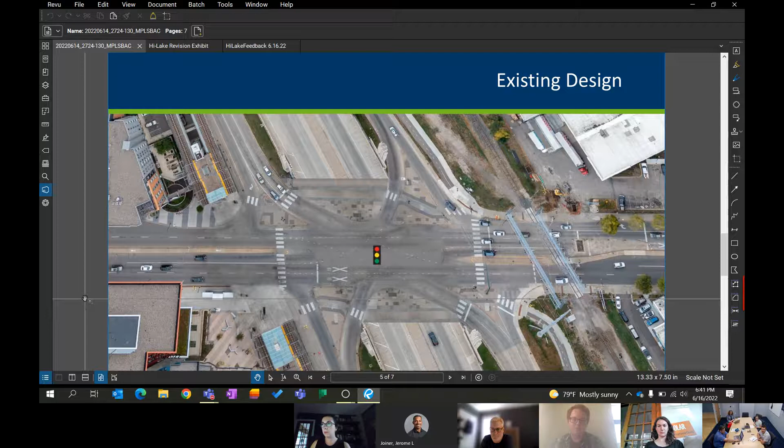With that, we'll go over to the layout. So we'll start here in the middle. The scope of the project really goes from 22nd Avenue to Snelling on the east side.

So that really shows where the focus of the project is. As you get on either side of 22nd or Snelling, we have work beyond that, but that's really trying to tie into existing Lake Street from the work we're doing at those intersections.

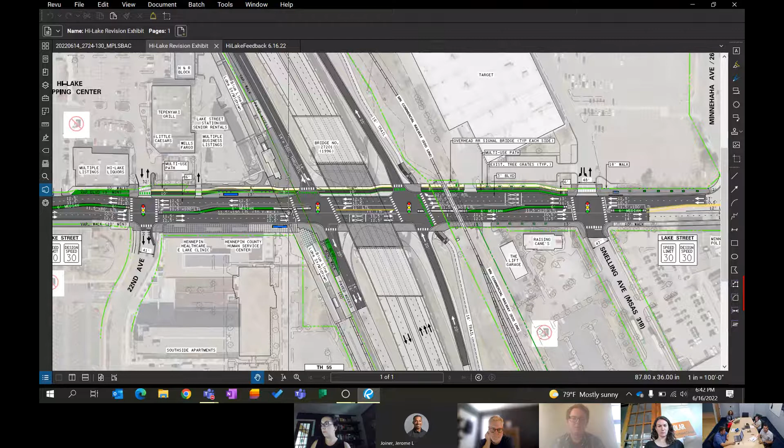So as we zoom into the actual interchange, you can see underlying where the old ramps were and how much we're tightening up the different corners and the different intersections for both ramps here.

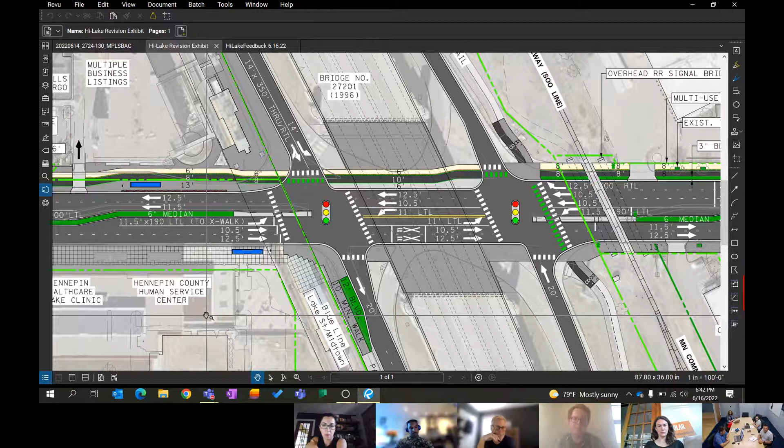Tightening up the corners will really slow vehicle speeds down as they turn. We're tightening up the travel lanes from 12-foot lanes to 10.5-foot lanes. We've identified a number of spots where we can provide more planting space, so a lot of the green on here is spots where we can plant trees, grasses, or other vegetation.

We've reduced the number of lanes coming off on the ramp. As you're coming southbound on Hiawatha and getting off to Lake Street, today there's 3 lanes there, and we're going to reduce that down to 2 lanes. And as you're going northbound on Hiawatha and getting off at Lake Street, today there's 2 lanes, and right now we're planning to make that 1 lane getting off.

So again, working to reduce that crossing distance for people trying to cross those roadways.

One of the big parts of this project, and especially the engagement we're doing, is the space under the bridge. As we reconfigure it, there's going to be a lot more space under the bridge, and we want to make sure there's a good plan for how that space is used, so it doesn't end up being a forgotten space that isn't an asset to the communities around it.

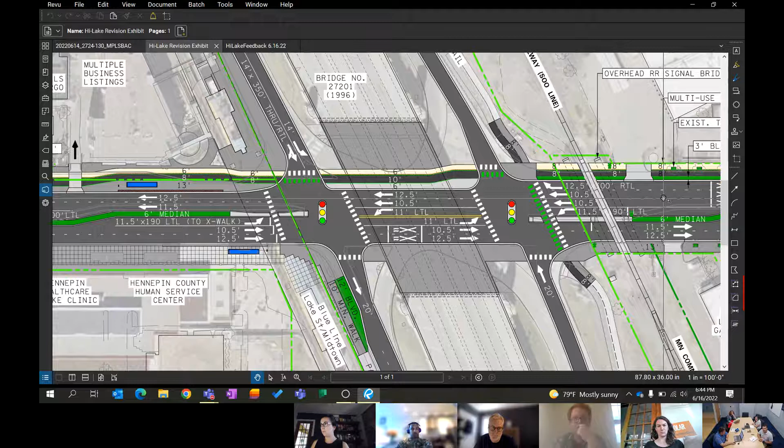As we move to the east here, I will note we have a bike facility on the north side of Lake Street that will go from Snelling to 22nd. There's a number of mature trees on both the north and south side of Lake Street that we're really going to try and keep.

If you were going to start over and optimize how you divide up your sidewalk space, we'd probably put the trees in a little bit different spot, but we really feel that maintaining those mature trees is important. So we're working within the confines of where they are today for our sidewalk space.

As you get over to Snelling, we have bump outs to again reduce that crossing distance and encourage vehicles to take those corners slower.

Also working on tightening up the driveways out of Target - their main entrance and exit right at Snelling, as well as a truck entrance and exit over by the railroad tracks that we're trying to tighten up and relocate to a better spot, while still making sure they can get their trucks in and out for their loading facility, but not as wide as it is today.

Then as we go to the west side, on the south side, we have the service center. We're keeping that pretty much as it is today, not looking to reconfigure it too much. On the north side, today there's a right turn lane into the shopping center to the north. That turn lane is going away, providing extra space for pedestrians and bicyclists, and you can see in blue the new A-BRT station for the B Line that will be installed in this area. Again, a bump out at 22nd Avenue on the south side, and on the north side, the driveway entrance into the shopping center is getting tightened up, so it's not as wide as it is today. We're trying to balance the crossing distance with the impacts to their access roads and parking lots there.

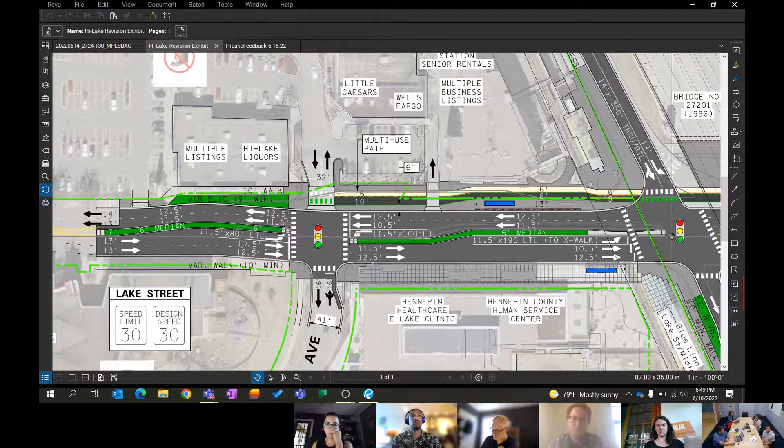One thing that Metro Transit did raise for consideration with this project is a queue jump, maybe to the east, Jason, if you want to go - which could allow the bus to get a head start at that right turn lane, in the event of a red light turning green. That's something that's in a later design phase of the project.

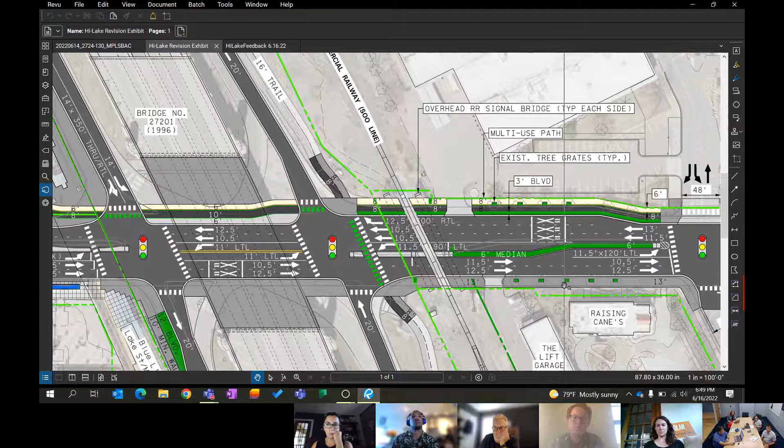Great, thank you. Did we do that justice, Yasna? You're involved in a lot. Okay, that's...

And I know we don't have a large number of community members on the call tonight, but in case they have ideas after seeing this presentation, what are their opportunities to inform either the layout, the landscaping, or any of the next steps coming forward? Yeah, I would say reach out to me and I'll connect them with the project team and we'll get those comments circulated and addressed.

The landscape architecture and urban design portion of this - Jeff and his team will be working on some concepts this summer, and hopefully we'll go out later in the summer into the fall with some of that work and those concepts. I think some goals are to try to get to some open streets events this summer, so not only can you contact Kelsey, but you can see us out and about.

Maybe one other thing I'd add - if folks want to go to, there's a Hi-Lake website on Hennepin County that connects to the story map for the project. There's information up there about the work that's been done so far on engagement. We heard from about 500 folks on that front, and there's a project advisory committee that we're keeping in the loop on that. They've been involved throughout this, along with neighborhood associations and things like that. So there are voices in the community as well that you could go to if you have questions about what's happened so far or want to connect.

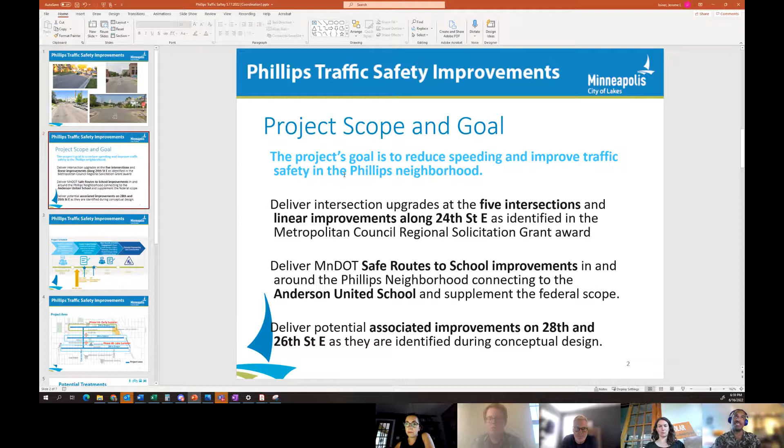We're also looking to deliver associated bikeway improvements on 28th and 26th, which will get started in phase 2, the second part of phase 2. It'll make more sense later.

Right now we're in the summer of delivering concepts based on city policy and community comments we received last year during phase 1.

This summer will be broken up into two parts. We're doing phase 2A, focusing on the intersection at 25th and Chicago, the two intersections on 24th, and also linear improvements on 24th. Those are targeted for the beginning of this summer, particularly because we need to run a bit more technical analysis and volume counts on 28th and 26th to really get to those concepts later in the summer.

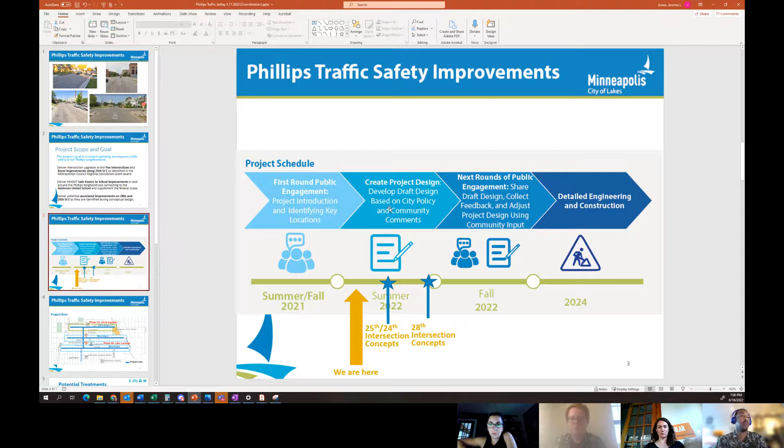So we're looking to have an open house later this summer, and then do interim updates to the groups at the beginning of this summer. We'll be going out to the Little Earth community, the Phillips neighborhood, and some of the other community groups in the area this summer.

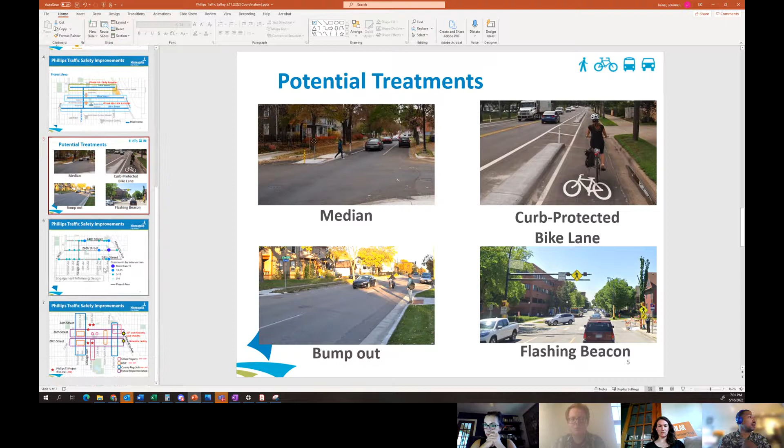So I want to talk a little bit about the community comments we received last year. Mike launched a very comprehensive community engagement with the numerous communities there. There's a strong Somali population, a strong immigrant population, Hispanic and Native American population in the Phillips neighborhood, and I believe it's the most diverse neighborhood in the city.

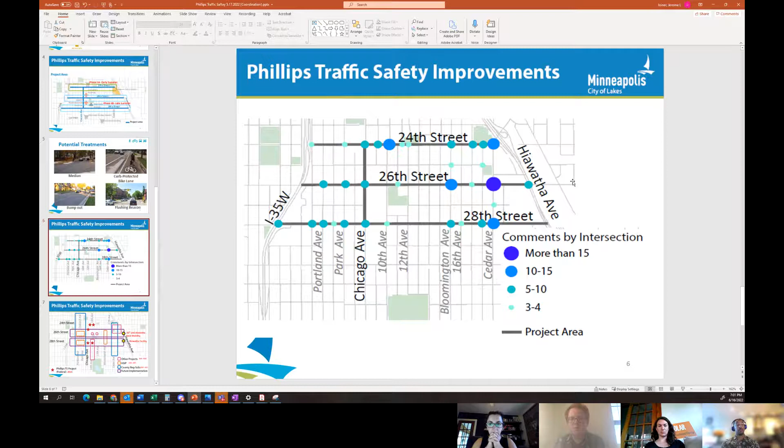I believe Phillips is the most diverse neighborhood. So we're really trying to do our due diligence to bring community along on some of the decisions we're making that are very technical and esoteric sometimes, also translate our materials into different languages and make them accessible, and meet community where they are as we're conducting our engagement.

I want to talk about the comments we received last year. We put out a questionnaire to the community. We didn't identify where the project extents or boundaries were—we just wanted to understand from the Phillips neighborhood where the perceived safety issues are in and around the neighborhood, so we can accommodate those as we move forward.

We got a lot of comments back, many related to Cedar, speeding issues on 28th and 26th, inappropriate parking on 24th Street, and some assorted comments throughout the neighborhood outside the project extents. Realizing that the perception of community needs is much different than the limited scope of this project, it's important that through this project we coordinate and communicate all the overlapping projects in the area.

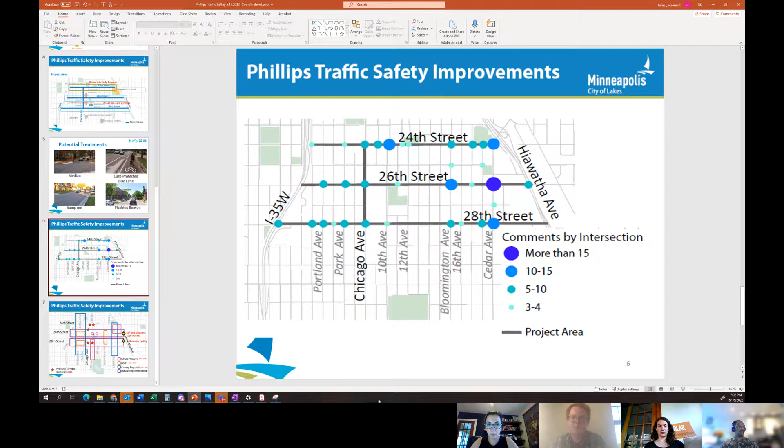Over the next 8 or so years, there are a number of projects addressing many of the locations that community highlighted during phase 1.

So later on in '26 to '27, the county has put together a reconstruction or federal grant application to do improvements on Cedar, and also Park and Portland.

The city is also leading some safety treatments on 28th and 26th related to speeding, with the intent to get those off the Vision Zero network. There are improvements coming from the city at locations and intersections in the Phillips neighborhood, like traffic circles, which are also related to traffic calming.

So there's a wealth of projects coming through the neighborhood, and I think the next step we're gearing up for is communicating that information while also responding to community's comments about where they want improvements to happen. In addition to narrowing the scope of the Phillips project, we're communicating all these other initiatives as well—that's where we're headed.

We're gearing up for a couple of engagement events. One is next Friday at the Phillips East Carnival, where we'll report back on last year's engagement and talk about our honed-in scope for the federal portions of the project. We'll also be meeting with some community groups through our Midtown Greenway Coalition, who is on contract for engagement and outreach.

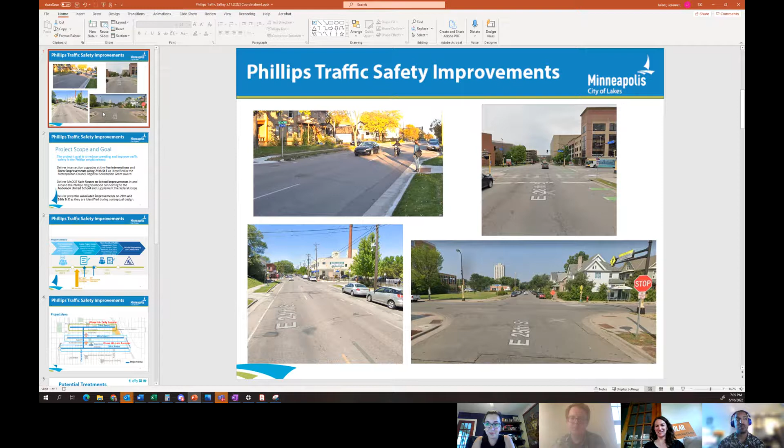Yeah, oh yeah, that's fantastic. It's great to see all of it on a map and have the different improvements explained. What's good is that if you look over the next 8 years, the neighborhood is really going to change.

Depending on the scope of all these projects, there are huge safety improvements—28th is a high injury street, 26th is a high injury street, Chicago is a high injury street, and I'm pretty sure 24th is a high injury street too. It's good to see all these projects coming in, and the only onus on us is to coordinate these projects and make sure we're not stepping on each other's toes.

Yeah, well, as a Phillips West resident, I am intimately familiar with some of the different safety challenges as a pedestrian, bicyclist, and driver within these corridors, and have seen some of those improvements already made with some of the dedicated bike lanes on 26th and 28th. I use those regularly, so yeah, this is great.

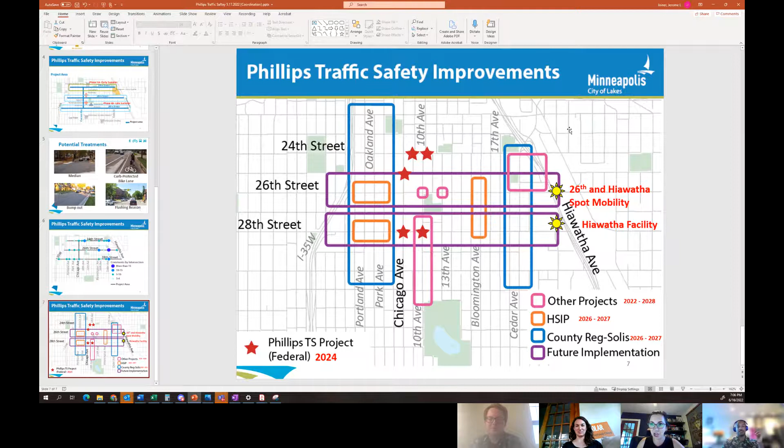My project is nestled within that larger map, within that little pink box, closer, adjacent to Hiawatha, right there. So thank you for that, Trey. Good segue into my project. Let me just share my screen.

So my project is actually not a... it started out, it became several different things. What we're calling it is the 18th Avenue South and Little Earth Transportation Study. But initially it started out as some interim improvements to streets, then it transitioned to a study, and then it became a demonstration project, and it is now going to be a capital project.

I know most of you have likely heard my presentation before, but I'll just kind of rewind back to 2020 to give you a little bit of context of how my work evolved.

So in the summer of 2020, as we all know, the East Phillips neighborhood experienced an increase in public safety concerns on the heels of civil unrest following the murder of George Floyd, as well as the ongoing challenges due to the pandemic.

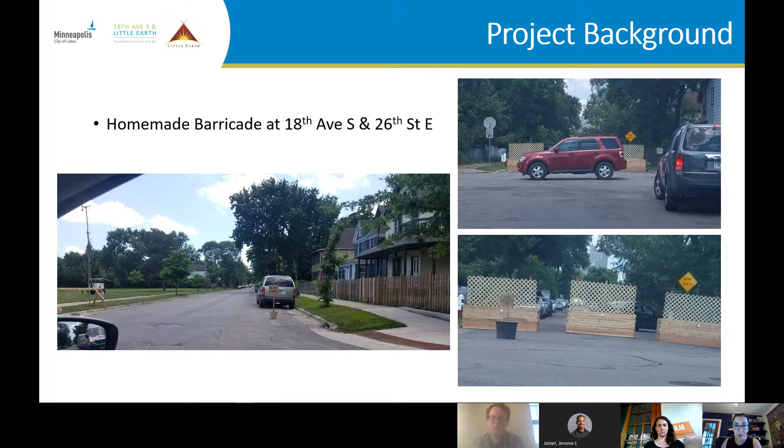The overwhelming ask was to make the closure of 18th Avenue South at 26th permanent. For many reasons, this was not possible. So in the interim, our Traffic Division came up with some other solutions in the area that you see here.

There were many changes done in 2020. First, 18th Avenue became one-way all the way from 24th to 26th Street. This is 26th, this is 18th here.

Traffic also ended up installing these planters so people would not go the wrong way. This is near Baby Space on 18th, which is a daycare that serves the local community.

Some parking restrictions were enacted, as well as curb speed bumps. And then over on Ogema, which serves predominantly the Little Earth community, these pinch points were installed in order to calm traffic and slow vehicles down.

It was at this point that a bigger-picture conversation started ramping up in terms of having potential discussions around permanent improvements to the streets surrounding Little Earth. So that's where I came in.

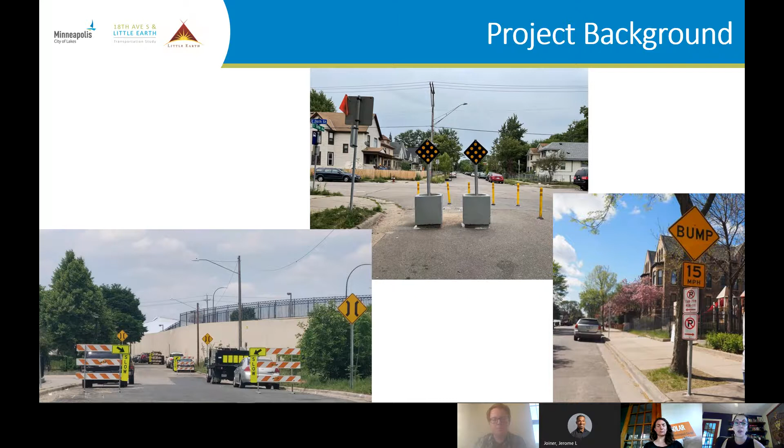This was around early 2021, so just last year. My role was to really build on this past work and engagement by our traffic staff and the Ward 9 Council office, and commit to a planning process of working with Little Earth on a study for a redesign of the streets of 18th Avenue between 24th, 26th, Ogema Place, and Stately.

As we all know, Little Earth is nestled within this triangle here, and the remaining land use is residential East Phillips homes, neighborhood homes, and then we have a couple of institutions, including a church and two daycare centers.

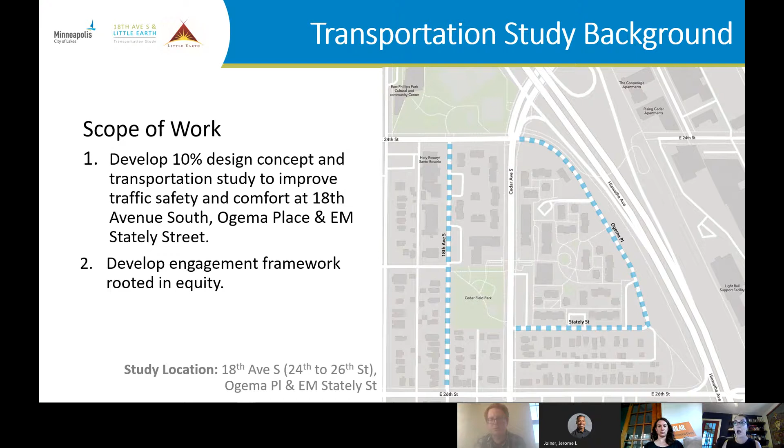My role was to develop this study and a 10% design concept to help put this into a capital budget request for future improvements, and also partner with Little Earth to create an engagement framework rooted in equity. Because this wasn't a capital project, we didn't have timeline constraints, but it was a big challenge that this was an unfunded initiative, so I went into this without really any resources to partner with Little Earth.

So just a little context on the area. This is the first thing I started looking at: what are the existing conditions, what are the existing challenges. A lot of this isn't new to anyone. We wanted to limit the scope to ensure we're focusing on the residents of Little Earth and that the street changes are reflective of them.

So we looked at existing conditions within a quarter mile of the study location. The two demographics most represented there are American Indian and Latino. The population is very young, with 38% of the neighborhood being youth under 18, and for Little Earth residents that percentage is even higher, at 50%.

74% of residents here rent, compared to 53% citywide. We also wanted to look at the residents' concern that people were coming in from outside the neighborhood on these very local streets, which serve up to 400 vehicles a day. We used streetlight data, which relies on cell phone data, and found that about 33% of traffic on 18th was cut-through traffic, meaning it was people coming from outside using those streets for cut-through trips.

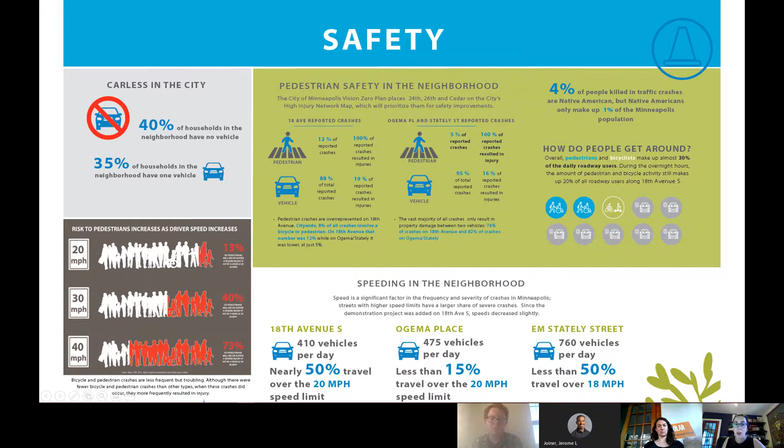As Trey just talked about, our study area is nestled within a number of high injury streets as identified in our Vision Zero action plan. This is the map Trey showed, highlighting ongoing Phillips traffic safety work, with my study area shown in green. We have several high injury streets, including 24th, 26th, and 28th, which are city streets, plus Hiawatha, a major state roadway, and Cedar, which cuts through the community.

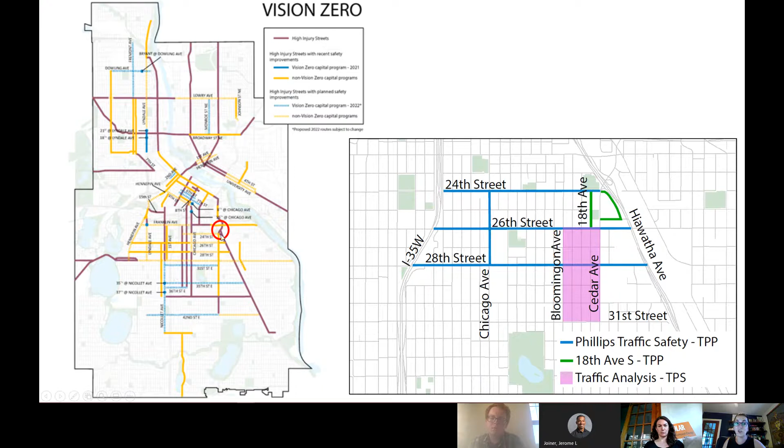In addition to traffic safety, a very critical part of our existing conditions analysis was green infrastructure. The study location is identified as both a sustainable landscaping priority area and a green infrastructure priority zone. As you're all familiar, the project is within the Southside Green Zone.

The study also found that this area is missing out on an easy 22% of potential additional urban tree canopy. I'm referring to the Twin Cities Metropolitan Area Urban Tree Canopy Assessment and the subsequent Minneapolis Urban Tree Canopy Tool.

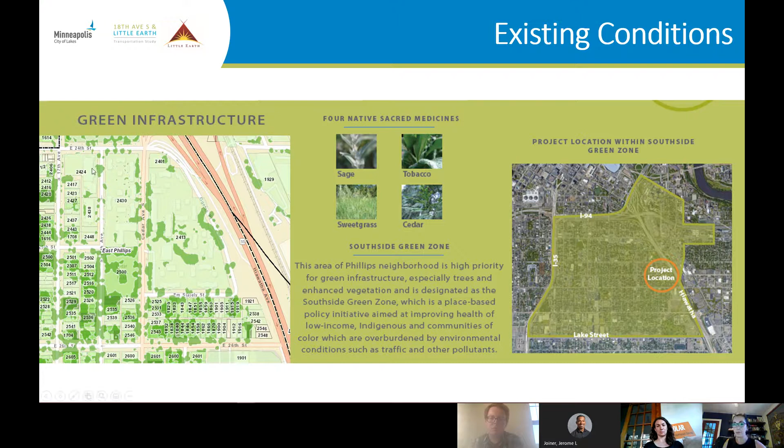So with all of this in mind, and with really not a lot of resources or funding, fittingly enough, there was a grant offered by the National Association of City Transportation Officials called the Streets for Pandemic Response and Recovery Grant. This was the second year NACTO was offering this grant, in the amount of $50,000.

Previously in 2020, the City also applied and received the same grant for the Mobility Hub pilot. So we decided to apply again for this project and were successful in obtaining the grant, which really enabled us to partner with Little Earth.

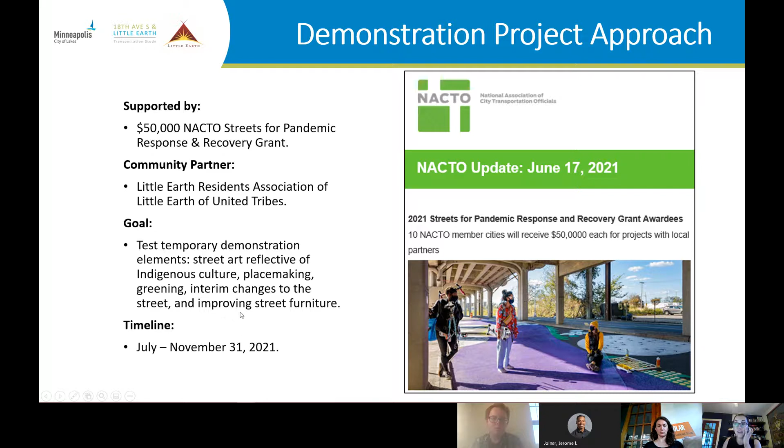Our goal of that partnership was to test temporary demonstration elements, including street art reflective of Indigenous culture, placemaking, greening, safety improvements, as well as adding some street furniture.

So what we did is we partnered - it was really to the credit of the Ward 9 Council Office who introduced me and made this partnership with Little Earth Residents Association. We partnered with the Native Youth Art Collective, who are pictured here, the amazingly talented Native artists we worked with in order to make this demonstration project happen.

So the resulting outcome, which was shared in the NACTO final grant report shown here, some of the photos.

We ended up doing the demonstration project on 18th next to Cedar Field Park. That's where a lot of negative activity was occurring, and people were stopping in this area - there used to be parking there - engaging in that activity in the park and driving quickly away.

So the park board ended up installing a fence along the perimeter of the park, and our traffic staff removed parking. This area was just kind of a lot of concrete space next to a park that the community uses for powwows and other events and celebrations, and it really became a wide street.

So we decided to repurpose that space, create it into - have some street art, planters, and really create it into a people place where people can sit and just enjoy being in that area. The resulting outcome is we transformed over 2,000 square feet of street space along that area.

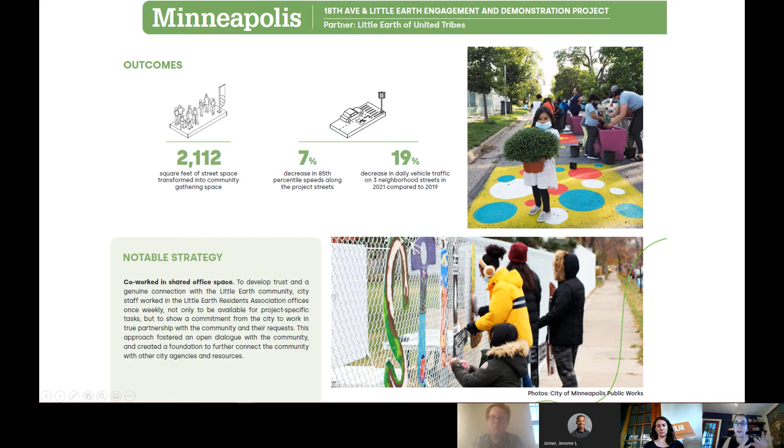In addition to the demonstration project, we also partnered with Little Earth on two community workshops, which helped us with the engagement for the transportation studies. The workshops were held, one in fall of 2021 and one in winter of 2022.

We were able to compensate community members for their time using the grant money by purchasing gift cards. We had s'mores, fires - it was a lot of fun and we had a great turnout.

Something else that happened as part of that grant - it also enabled me to start co-working out of the Little Earth Residents Association. I know many of my colleagues here on the call are also co-working out of that space as well.

So this is the director of Little Earth Residents Association and some of the staff there during one of the many potlucks that I was so fortunate to be a part of.

So the end result - we did develop these 10% design concepts for each one of the segments of the streets. This here is showing 18th Avenue South. As you can see here, these are existing conditions, and this is proposed.

We're proposing a one-way celebration street, which would convert a lot of this concrete space into green areas, a shared use area - this is next to Cedar Field Park here. There will be a diverter that would take traffic off of 18th and really make this a community space and street where kids can play.

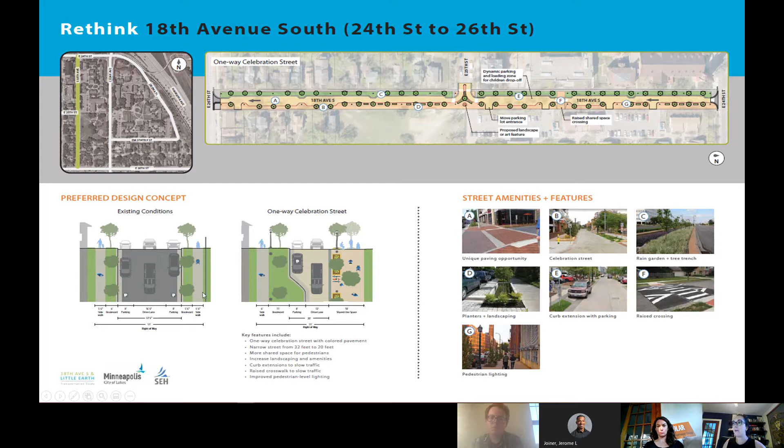You can see some pictures of the rain gardens, tree trenches, planters, and landscaping, which will be a huge component given that this is a priority for green infrastructure. For Ogema Place, we are proposing a one-way to two-way celebration street, transforming a lot of that concrete into green space and permeable surface right next to the Little Earth Urban Farm. I know the community likes to have a lot of events back here, so we're adding long-term street art reflective of the culture, more green infrastructure, and overhead street lights to bring in that atmosphere and let this be known as a community space.

One of the big changes we're proposing is closing off Ogema at Cedar and converting this into a greenway, a shared use path for people walking and biking, adding more greenery and trees back here.

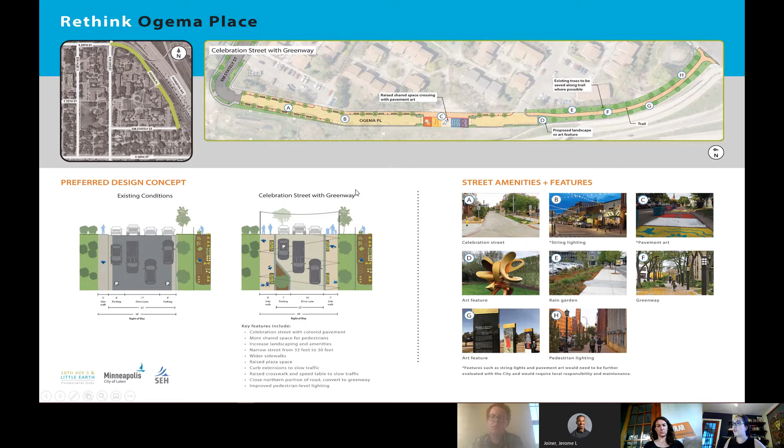For Stately Street, we weren't able to do too much because of the parking utilization. Our data showed a lot of people use the street to park on, and there's already a lot going on here, like property damage and crashes. So what we're proposing is enhanced landscaping, adding bump outs and speed tables to slow down traffic, more greenery, pedestrian lighting, and rain gardens, but keeping the street similar to what it is today.

This evolved first from a study where we had no funding, and then we received a grant which we were able to utilize. I'm excited to share this is now in our CIP, the capital improvement program for 2023-2028, more so on the back end. We'll be seeking additional funding to supplement it, but overall I'd say we achieved our goal of creating this concept and being able to pursue permanent changes.

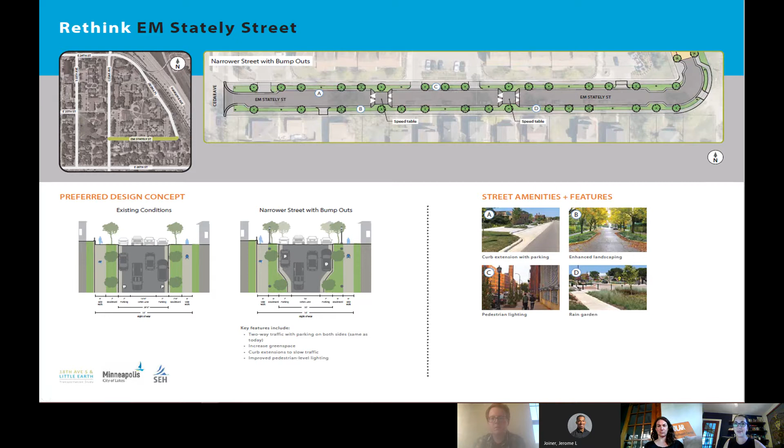So that wraps up my presentation.

Thanks, Yasna. That project in whole is just really exciting. Thank you. It's been one of the highlights of my 10-year career for sure. A labor of love. Yes.

Adam, did you want to add anything? I think you helped out at at least one of the events. I was there and ate some s'mores. I got bullied for not wearing a jacket when it was like 30 something degrees. I thought it was warm enough to not wear a jacket.

Evidently not as many people are as hardcore Minnesotan as I am. I know Yasna's work is really appreciated by Little Earth. Adding in the green space and reducing traffic is huge, especially with how many people have asthma at Little Earth. Every time we have a LIRA board meeting, which is the meeting of representatives of the residents, somebody always brings up someone who has asthma and this issue. So the green space and reducing traffic is really appreciated. The more vertical aspects of the features will also be appreciated because there are a lot of safety concerns in terms of gang and gun violence. I think Yasna's done a great job with this, a huge round of applause to her.